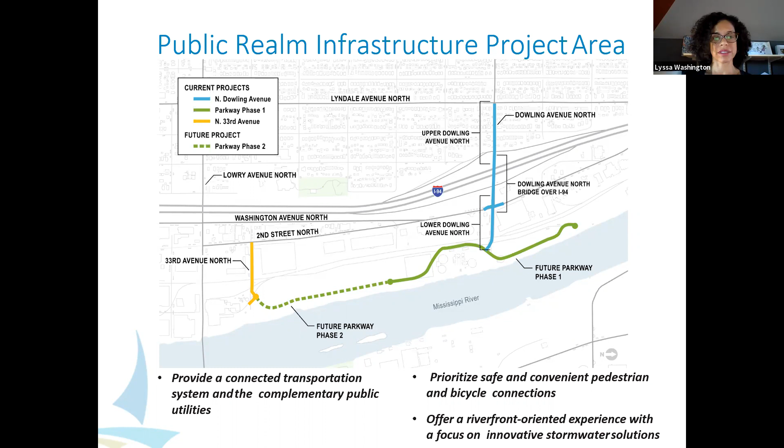Just to center us again on what public realm infrastructure is, it's designed to help people access the site comfortably and safely. There are a lot of key components, as you see on this slide, that include a connected system of sidewalks, bikeways, transit lines, and streets, as well as an extension of the public utilities.

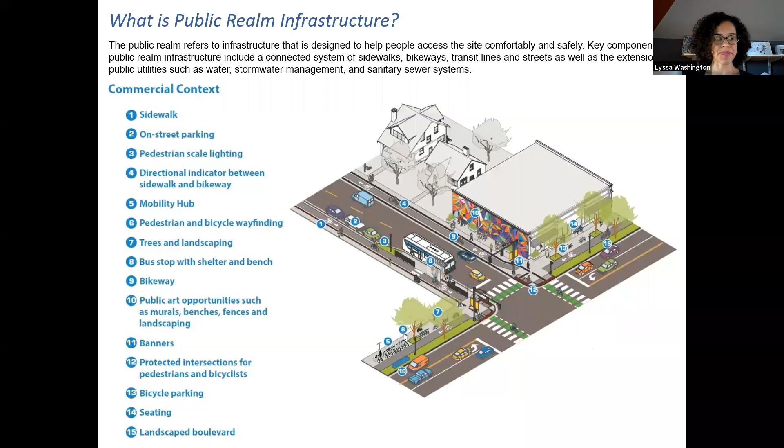This is demonstrated by the sidewalk and providing bicycle facilities that meet the area, identifiable cross sections for safe passage, public art, and robust areas for those bike and scooter stations, et cetera. So just some of the elements.

In a more residential context, I think the big difference here is talking about bridging those intersections and bringing them in a little bit closer so that people are able to cross the street in shorter time periods, and allowing for some of those intersections to be slightly raised, which Alexander will explain a little bit later, so that you are able to see pedestrians and bikers more clearly. Bring the lighting down to the pedestrian scale so that it's actually hitting the sidewalk and you feel welcome and safe in the area.

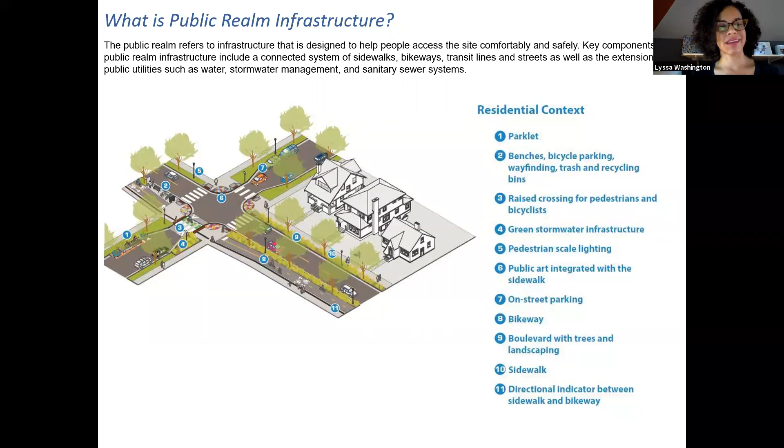So I'll let Dan talk a little bit about what we heard, and then we will go on to the actual intersections. As we mentioned, this is a second open house, and to inform the design of public realm infrastructure, the project completed an initial round of engagement earlier this year.

In January and February, including the development of a project website, the launch of a community survey, as well as an interactive comment map, a tour of locations near the Upper Harbor Terminal site, a visual or video tour, a round of focus group meetings with different representatives across the community, as well as mailers and virtual office hours with Dowling area residents.

Some of the themes that we heard were the prioritization of pedestrians and bicycles, how this area needs to grow and expand to become more multimodal, safe, attractive, and connected. We also heard some really positive and good feedback centering around public art.

That public art should be welcoming, sharing the development history of the North Side, as well as the Dakota history of the area. The river came up time and time again in the engagement work that we did as a place to center and gather, as well as an opportunity for vistas and views of the river, connecting Northside residents and residents across the city of Minneapolis to the amenity that the Mississippi River is.

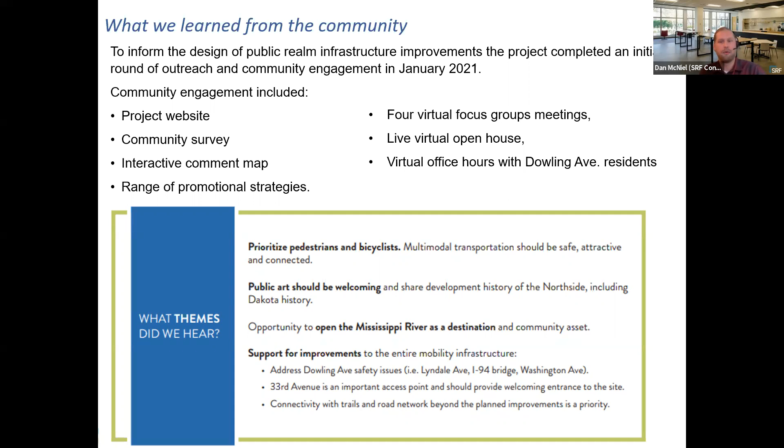The public realm infrastructure really looks at how people will travel to and from the site. So we heard concerns about safety issues along Dowling Avenue. We heard opportunities for a secondary connection point at 33rd and the importance of those multimodal transit options as well.

In addition to some of the larger themes we heard, some concerns came out about safety, particularly crossing the I-94 bridge at Dowling and traversing the entire length of Upper and Lower Dowling. We also heard a number of comments asking for the development at the Upper Harbor Terminal site to meet the needs of Northside residents, as well as questions about how this site currently has congestion along Dowling and the impacts future development may have on vehicle travel in the area.

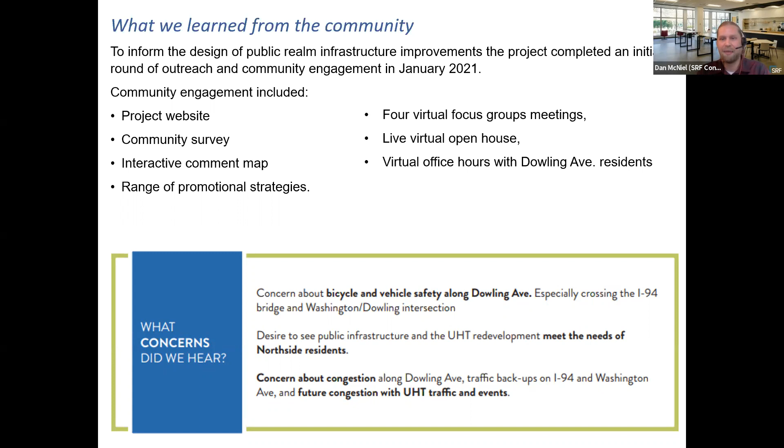With that, I'll pass it back to Lyssa to wrap up our recap. Okay, thank you. And so we talked also about what suggestions we heard.

Improvements to the 94 bridge, and then the potential to partner with the Washington Avenue businesses, which I think you'll see an example of that happening with Precision Associates. Foster a sense of arrival and vistas to connect the north side to the river. We want this to be grand and great for the residents, grounded and centered back for the north side.

And the support for green infrastructure. We want to capture and reuse the water on the site. And the public art elements could be linked together and lead you to and through the site, offering moments for introspection, thought, and gathering.

We've talked a little bit about pedestrian level lighting, signage, greenery, and public art, making this a really beautiful space for all who visit and all who call the Upper Harbor Terminal and North Minneapolis home. And then the desire to see the bikeway and walkways with physical separation from cars whenever possible. We want the experience to be multi-layered and dynamic.

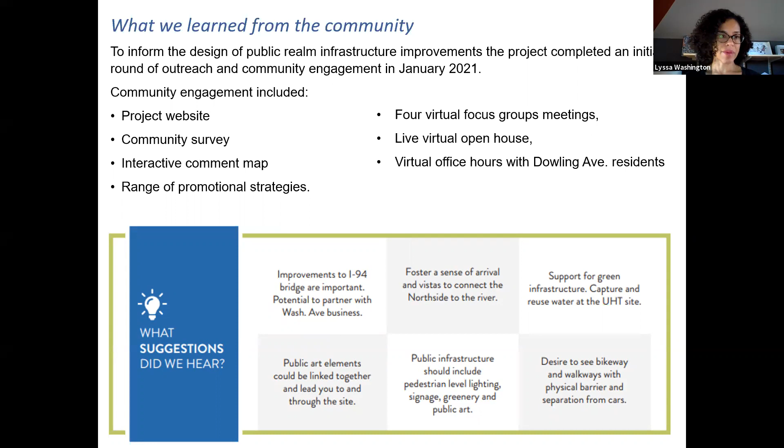So with that, I think Alexander is going to go through our roadway layouts with a little bit of help.

Thank you, Lyssa, and thank you, Dan, as well, for the great introduction to this project. I'm Alexander Cato, transportation planner with Minneapolis Public Works, and I've been leading the engagement for this project. Really excited to talk through these things.

I'll try to move quickly since there's a lot of content to cover on the infrastructure as well as the many other pieces of this project. We're going to start at Upper Dowling. This is on the left side of the screen. You'll see, just for orientation, that is Lyndale and Dowling. That's the intersection, the western terminus of this project, and this is where we're starting the reconstruction efforts.

If you've been on Dowling anytime in the last few years, you're well aware of what that environment is like for any transportation user, whether you're driving, biking, or walking. We have a roadway with travel lanes and on-street bicycle lanes, and then sidewalk at back curb, so there's no boulevard out there. Bicycle lanes are in the street, with high vehicle volume, about 15,000 vehicles a day. So it's a really busy area and not really friendly to non-motorists.

So we really wanted to ensure that our design for this section provided some additional multimodal comforts. I really like this illustration on the bottom of the screen. It's been publicly shared for at least all of 2021, and it shows the shared use path on the south side of the street, with pedestrians as well as cyclists sharing that facility. It shows on the north side of the roadway a boulevard with some trees and greening, and that's what we're recommending for this area.

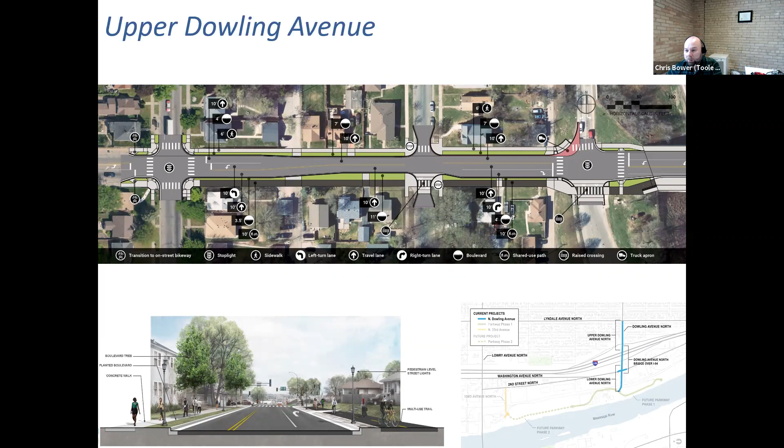Chris, anything else to cover on this before we transition to the bridge section? I think you covered all the big details. Again, if you have questions, feel free to populate the Q&A and we're happy to come back to this.

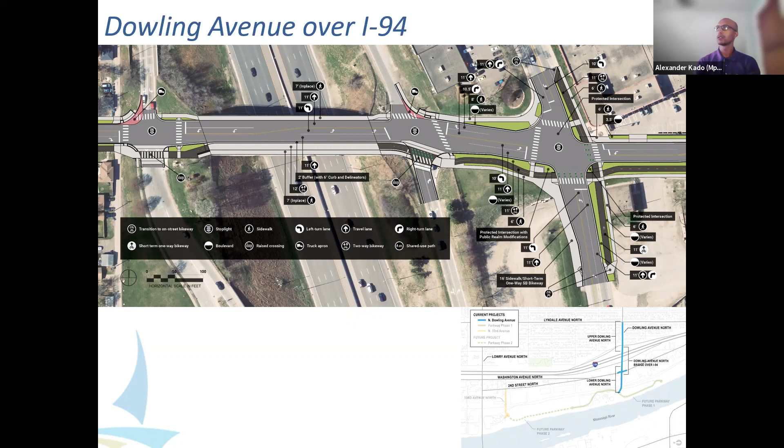Thank you so much, Chris. Next slide, please. Okay, so now we have Lower Dowling. You can see the continuation of the cycle facility, the two-way one, as well as the sidewalk. We also have a sidewalk on the northern side. We've been doing some work with the property owner there, Pursues and Associates, around some potential art opportunities. I won't go into detail on that now because in a few slides, we'll have some of our other colleagues talk through that. A few design pieces to note here.

We do have two active rail tracks here. Frequency is about 4 times a week, so almost every other day there'll in theory be a rail operation occurring. We're designing in some gate arms that'll come down and block the roadway as well as the bike and sidewalk facilities. We're also installing medians on each side of the rail tracks.

Those are to prevent motorists from trying to drive around into the other travel lane and bypass a train. We all know that's very dangerous. So we've been working with MnDOT Rail because they provide a lot of the safety guidelines when you have a roadway that's crossing an active rail crossing.

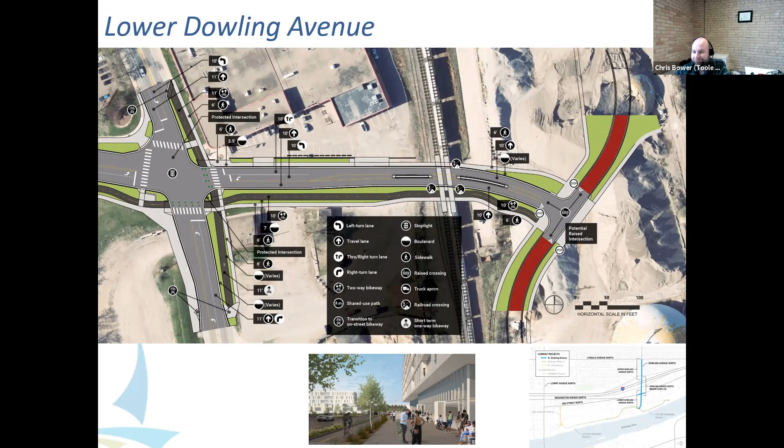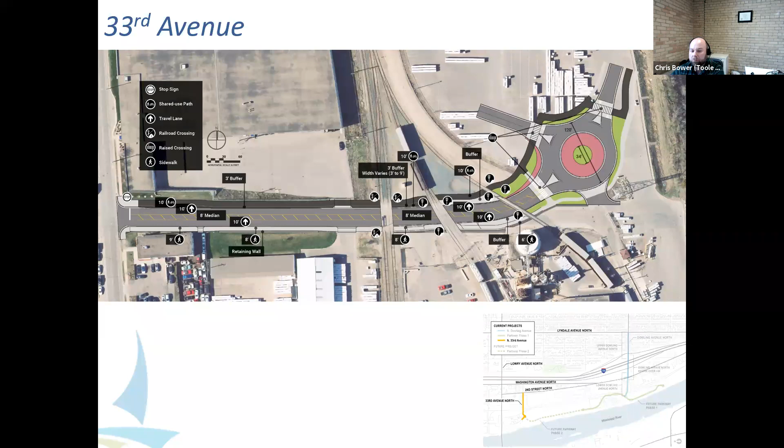Another design consideration we added is more raised crosswalks through the roundabout, trying to make those crossings as safe as possible and slow motorists down where those crossings occur. That's all I had. Same with me, Chris. Thanks so much for the support on that.

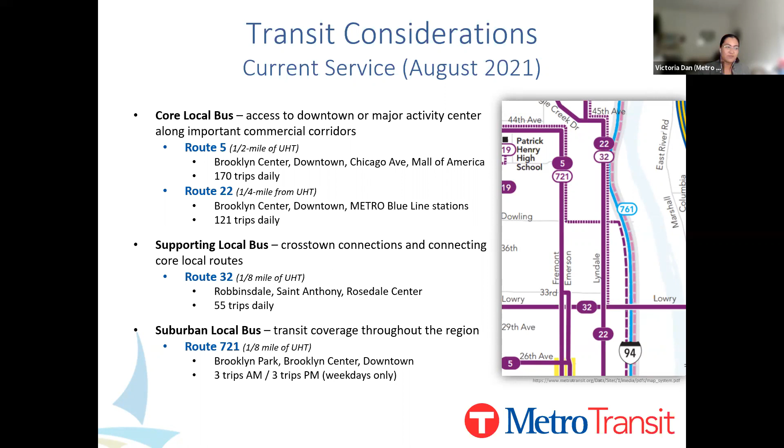Express routes do operate nearby on I-94, but today no express routes make a stop in the area, so we won't dwell on that too much here. We can move on to the next slide.

Looking into the future, new transitways will certainly influence the surrounding transit network. Metro D-Line, currently under construction, will substantially replace Route 5 and introduce bus rapid transit improvements to the corridor—that's where that half mile comes into play. We'd expect it to draw people from even further than a regular bus service would attract. D-Line is anticipated to open in late 2022.

Another major transitway influence will be the Metro Blue Line extension, which is in exploration to identify a new alignment for the future light rail line. This spring, the project released revised potential route options, including a variety of routing through North Minneapolis. Both projects will be accompanied by transit planning efforts looking at potential changes to the surrounding network. D-Line area service planning specifically will begin late this year or potentially early 2022. You can find more information and updates about these two projects online at metrotransit.org/D-Line project or at bluelineext.org.

Next slide, please. So these factors, as well as our transit planning principles, help inform Metro Transit's approach to planning potential future service into Upper Harbor Terminal or directly adjacent to the site.

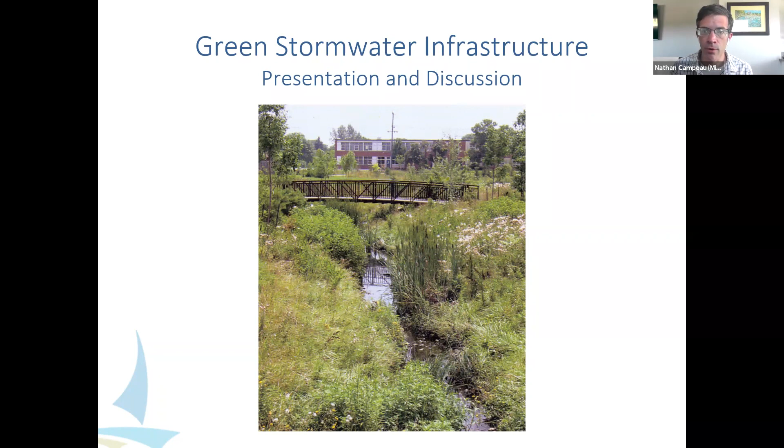When we talk about green infrastructure, we're talking about stormwater infrastructure that can clean and convey stormwater using plants, vegetation, and natural processes to clean polluted stormwater runoff from the urban environment before it makes its way into groundwater and into the river. That's as opposed to gray infrastructure, which are pipes and underground infrastructure—really important, but without as many of the additional benefits I'll be sharing today, which I think will be evident from a lot of the images selected for these slides.

This image is the headquarters of the Mississippi Watershed Management Organization, located just across the river from the Upper Harbor Terminal site, just north of the Lowry Bridge. On their site, they restored a historic ravine, using it to treat stormwater from new development in that immediate area, and convey it through native vegetation that provides habitat and physical connectivity for recreational access to the river, as you can see from the sidewalk that courses its way around and through the green infrastructure.

Some of you may be familiar with green infrastructure such as rain gardens, a very common type of practice. That's one of the many types of green infrastructure we're considering and envisioning for the site, and I'll show some images that illustrate that a little better.

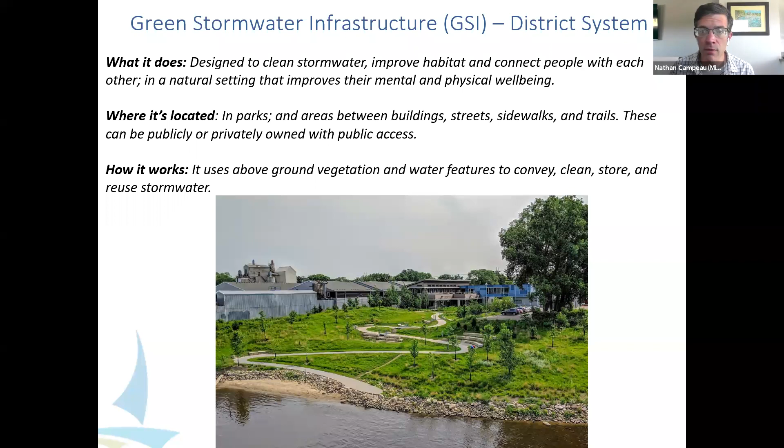On the site itself—and I'll show maps in a couple slides—we're really looking at creating a green armature, a blue-green armature, with blue being the stormwater part and green being the habitat part, that can envelop and connect the entire site as well as the adjacent neighborhood and the river. This stormwater management green infrastructure could be located within parks, between and behind buildings, along streets, sidewalks and trails, providing an expansion of the public realm, even into some development parcels where that can occur.

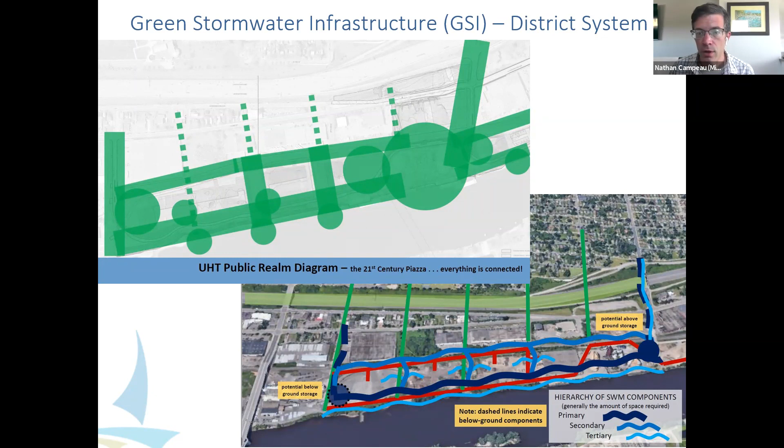If you go to the next slide, this map shows a rendering of what we are envisioning right now. We've reached a 30% design level to show what stormwater management, managed in a collective way across the entire 50 acres, could look like on the site. So between the parks, the parkway, and the development parcels, how can all of that stormwater be managed collectively?

Thinking back to the images you just saw that were more cartoony, on this one the blue areas represent the actual stormwater management features that would be filled with native pollinator habitat and provide connectivity down to the river. Even surrounding that are the dark green areas, additional habitat areas that would be planted with native vegetation. A lot of it would even be connected into the shoreline restoration that the park board is looking into to really restore this portion of the river and provide better habitat as well as recreational connectivity.

So really all of this is trying to work together. Within the park itself, we're envisioning that there might even be some features that look a little bit different, that might be a little bit wetter - some of the stormwater management features of the green infrastructure practices we're talking about, specifically within the park.

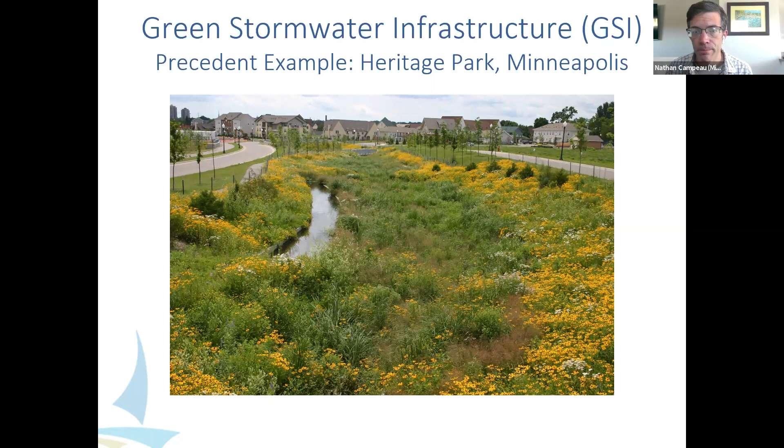A little further downriver, I guess over in St. Paul, the new Bell Museum has some open water features that relate to the buildings that I think are interesting and worth at least considering, because there could be enough water to have some level of open water features that provide a different type of habitat than just a typically dry basin, and can also provide additional water quality treatment.

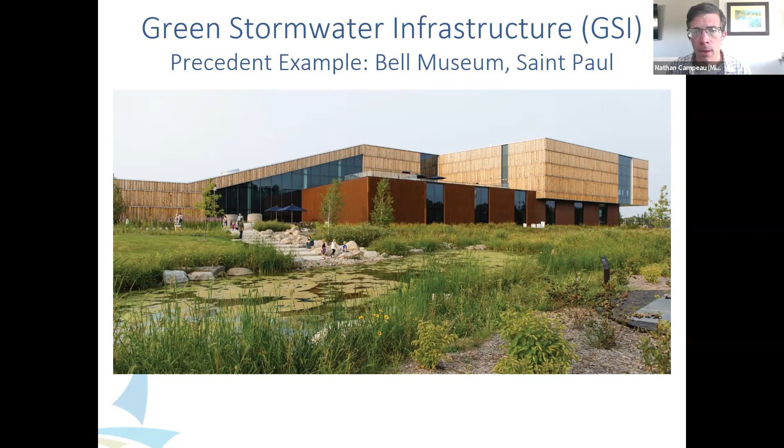Oh, and finally, over in southeast Minneapolis along Riverside Avenue, the city a number of years ago put in a large scale rain garden or infiltration basin green infrastructure along the sidewalk that again has very simple plantings but maximizes pollinator habitat, and really integrated well with the public realm there, to provide treatment for reconstructed Riverside Avenue as well as some of the adjacent streets.

And with that, I'll take questions. We're looking for feedback on what you like, what you don't like, how other themes from other things you've heard, other things you've been thinking about for the site could relate to this. Public art is, of course, an important one. There's a lot of different themes that others are talking about that I know that you all are thinking about that we'd love to get your feedback on.

Thank you, Nathan. And with that interest in getting some feedback, I think it's a good time to pause once again and see if there's any additional comments or questions those in attendance would like to share. We didn't receive any comments while you are presenting, Nathan, but we'll just take a few minutes to see if anyone would like to respond.

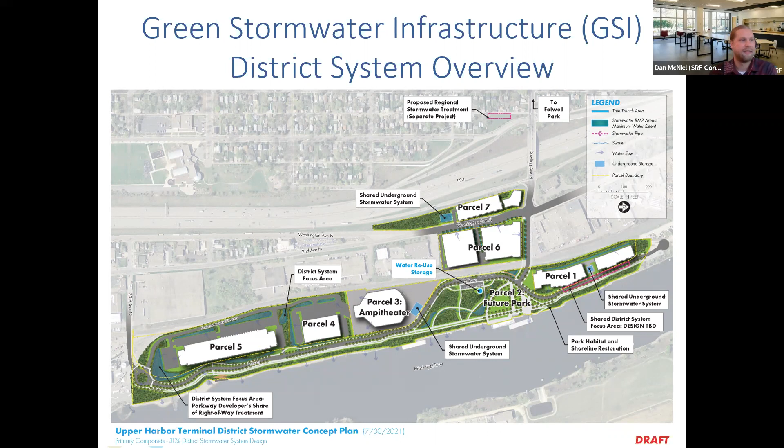Thanks, Nathan. Appreciate those questions, Peggy. We didn't receive any additional questions, so we'll just kind of pause for a moment. I'll advance to the instructions on the Q&A slide. If anyone has joined recently, we walked through a brief presentation as an overview of the project, information about the roadway design layout options, and transit considerations. Nathan just provided a brief overview of what is being considered for green stormwater infrastructure. So pausing here to see if there's any questions particular to green stormwater infrastructure or elements of the project that have been presented so far.

Otherwise, if we don't see any additional comments come in here in the next few minutes, we'll advance to the last dedicated section of our open house, which is public art in the public realm. At that time, we'll go through a presentation and Q&A and pause to see if there would be any helpful sections to go and revisit to represent those that have joined us or other questions you may have.

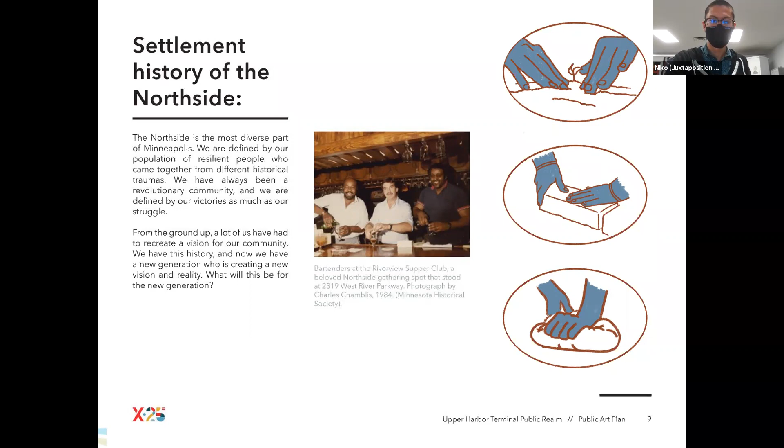And then these will in turn guide when art is selected for this space. We hope that these 5 themes will guide the selection of that art and help those artists have their art reflect the history and the needs of people in this area.

So with that, we're going to transition to a more specific piece of art being proposed for this place. There's still another procedure where we'll go in front of the Minneapolis Arts Commission and propose this piece of art, asking for funds to add it to this Public Realm project. But we'd love to hear your feedback specifically on the things we're working on right now.

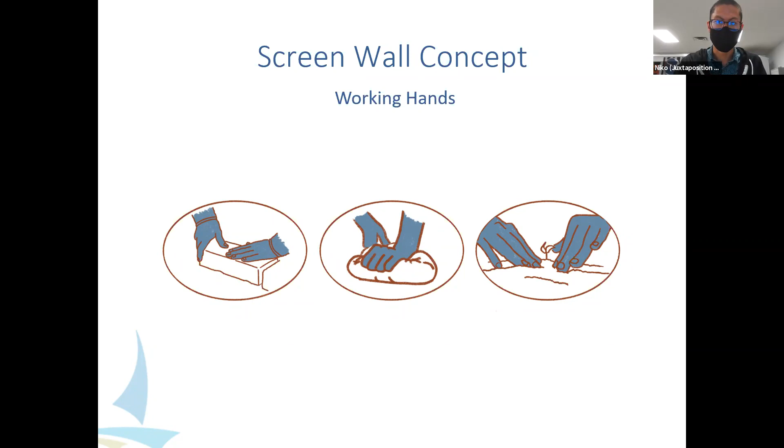So I think we can go to that question and answer, more interactive section, but we have a poll for you guys to answer here. This is kind of a how supportive are you of each of these concepts?

And Dan, I think you constructed this question. Could you help us a little bit with this particular one? Yeah, of course. So it'll be a series of 3 poll questions asking audience members to rank 1 through 5 their level of support.

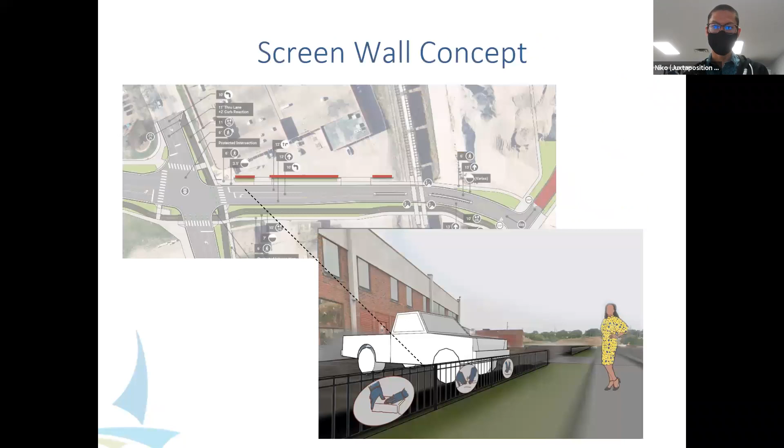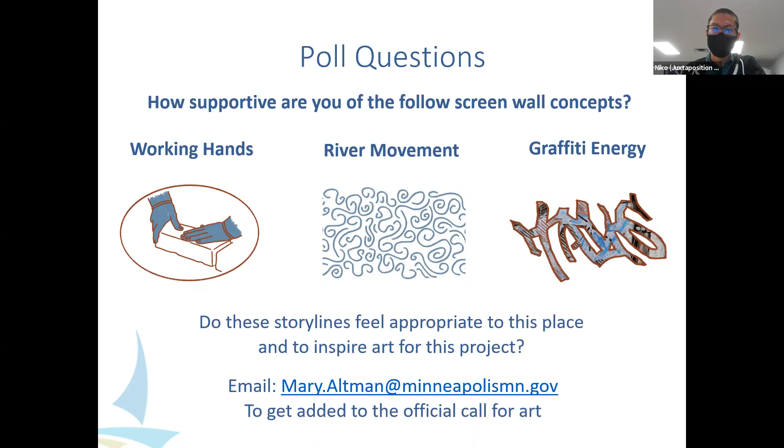Yeah, I think that's a great question. As you saw in the current three options for this Precision Associates fence, you don't see any direct effort there. I would imagine that in future requests for proposals or qualifications from the city, it seems quite possible there would be a request either generally for art that responds to the themes we asked for, which include things like native food sovereignty and settlement history—which definitely should include settlement by Dakota and other people who came before colonialism.

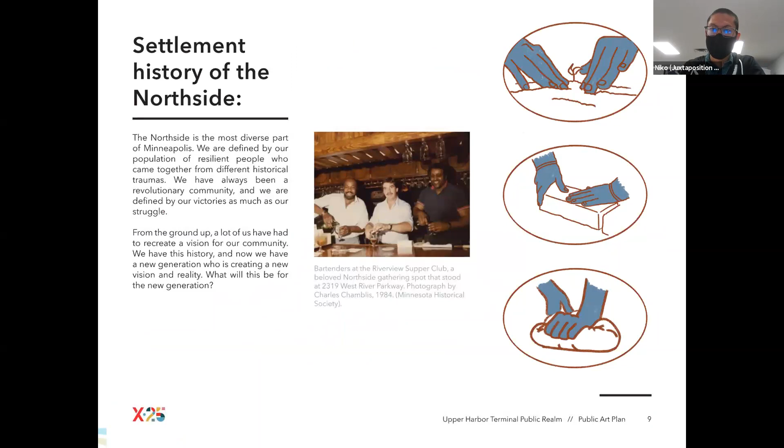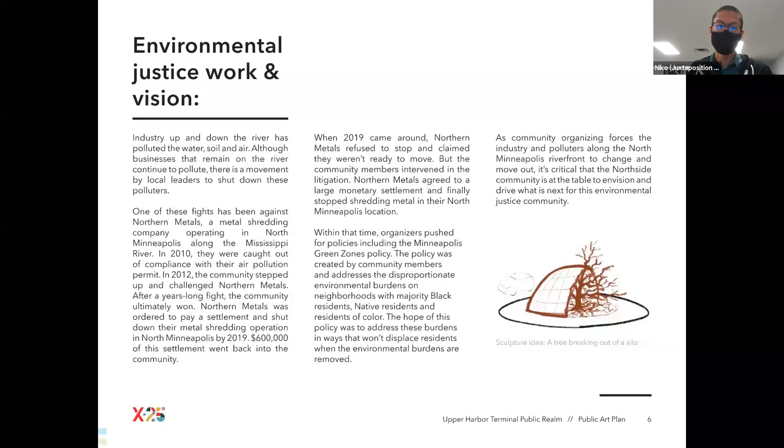And actually, recently, being an artist myself, I saw the city issued a request for qualifications at the Waterworks site specifically for people with Dakota knowledge, connection, and heritage. So I'm not going to say it's going to happen, but it's quite possible, and the city has the language to do just what you're asking about.

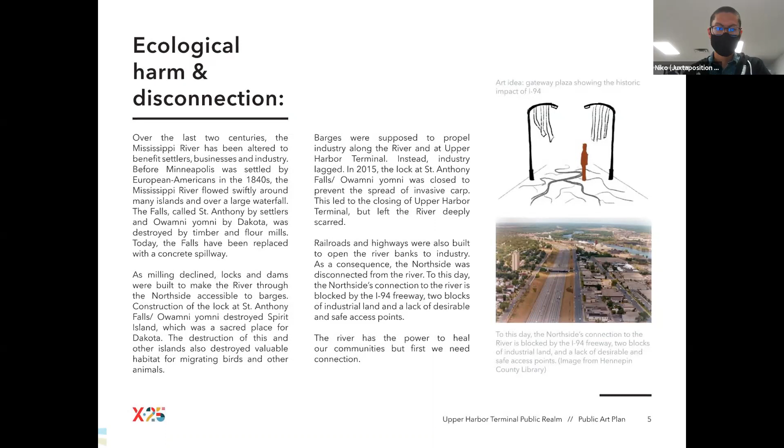Thanks, Niko, and thank you for the question. Appreciate that. A similar type of question came up in a few of our focus group discussions and survey responses, so it's nice to hear this question about understanding the settlement history of the North Side and Dakota culture along the Mississippi River.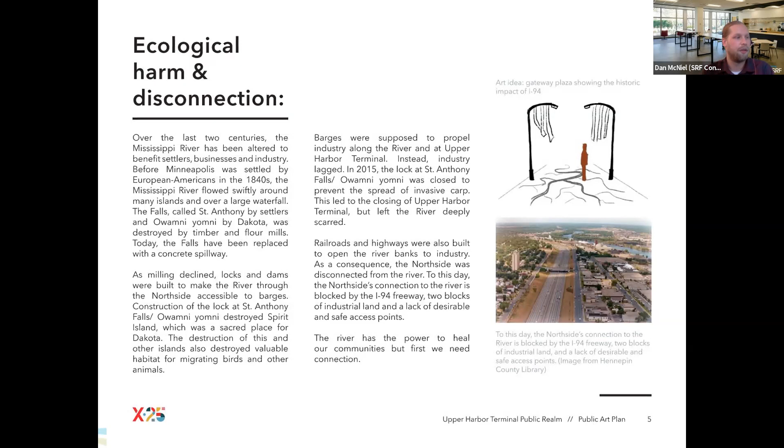It's now 5:30, coming up on the last half hour of the presentation. We've moved through each of the segments we had planned to present in our first go around. I believe a number of those in attendance have been with us from the beginning, but if anyone would like to ask any questions generally about the Upper Harbor Terminal site, the public realm infrastructure, or any of the sections we presented today, I'd be more than happy to make this an open Q&A.

Would also note you can use the chat if you'd be interested in hearing a brief presentation or synopsis of the sections that came before you joined the meeting. That would be a brief overview of the project itself and the engagement done to date, plus a summary of the roadway design layouts proposed as part of the project for Upper Dowling, crossing I-94, Lower Dowling, the planned Parkway through the UHT site, as well as 33rd Avenue.

After that, we had a short presentation from Metro Transit on transit considerations at the UHT site, followed by a presentation on green stormwater infrastructure from the Mississippi Watershed Management Organization, and then a discussion on public art in the public realm presented by Juxtaposition Arts.

So just a brief recap on where we've been during today's meeting. It is recorded and will be posted online, so please let us know if you have any general comments or if there's a section you'd like to return to. As we wait for responses, I will advance to the contact information for our panelists here today.